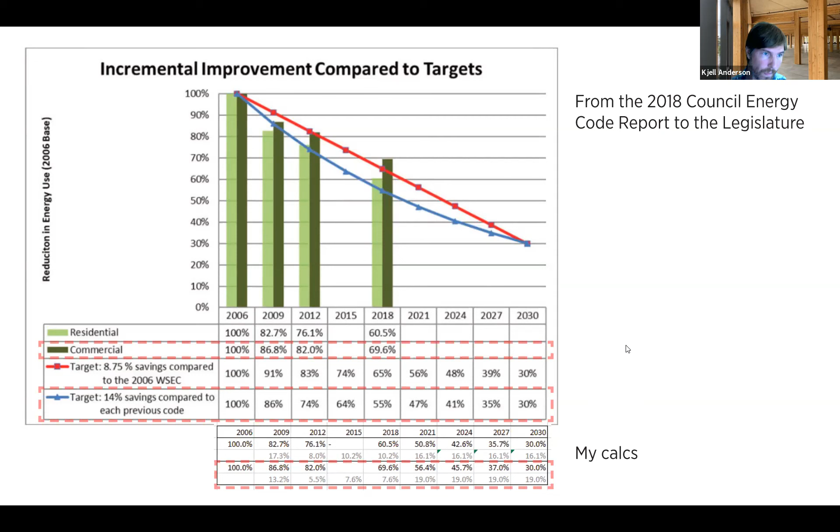We also considered that different building types, this is from the same report, have had different progress. For instance, retail has hit nearly a 50% energy reduction, so it's on track actually to meet the 70% energy use reduction. Whereas multifamily mid-rise was only 22%. That needs to get a bit more efficient.

There's lots of nuance that we could talk about in why these numbers are the way they are, but certainly multifamily mid-rise is a bit behind. Office is kind of right about where maybe it needs to be. Hotels and a few others are behind as well. This is all in the tag report, so we could put that in the chat if anybody wants to dig into that. It's a great deal of data, and the only touch point that the Building Code Council has with our progress on the energy code each cycle.

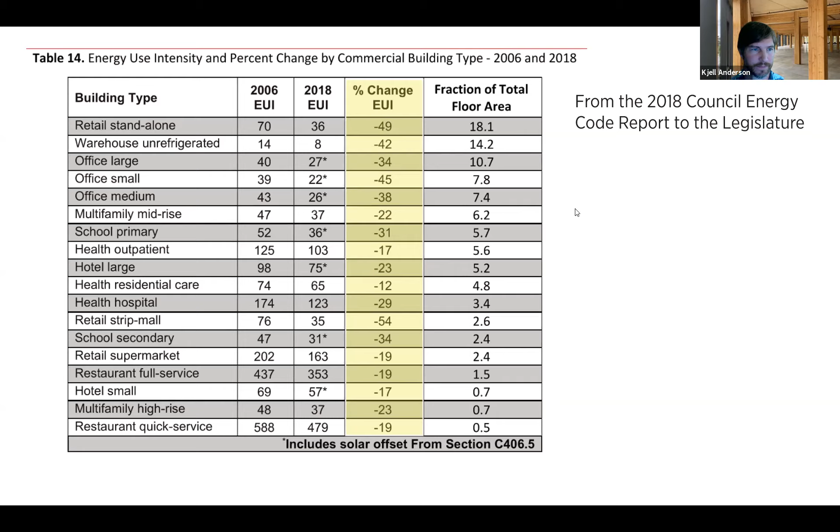So there's a couple other considerations we had this tag cycle. One was Clean Buildings Law, which will require all buildings over 50,000 square feet to do audits and potential retrofits if they do not meet certain energy use targets. That is being run by Commerce and is outside of the energy code. Yet, if buildings have to do the retrofits, they will have to comply with the energy code.

And it would be a dereliction of duty, in my opinion, if the Building Code Council wrote a code where buildings would be built and need to be retrofitted within the first 10 years or 5 years. That seems like we'd have a lot of irate building owners who would be justifiably irate if we did that. So that's another consideration.

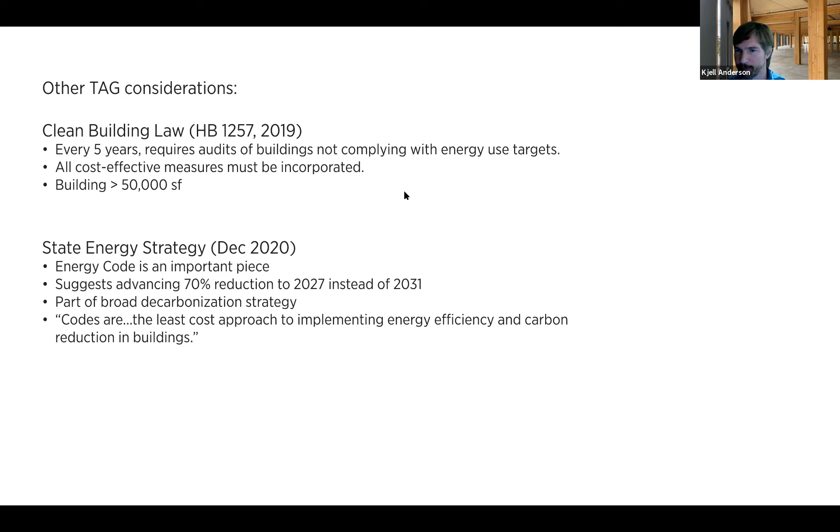And then the state energy strategy that was published in December 2020 is another consideration, and that relies heavily on the energy code for a lot of efficiency in new construction. So I'm just bringing it up so we have the lay of the land. We can discuss in more detail later.

And then this is on the agenda and the tag report, and this is basically a summary of all the proposals. Almost all the proposals were unanimous or maybe had a few abstentions. There were only a few. The green ones all passed, and you can see what the vote was for each of these here. So 14-1 this one, 11-1 this one, but we spent a lot of time on it. This one was 11-5. This one was 7-5-3, and then 12-1-2 on the other piece of the metric.

So the votes are all shown in here. The green ones were adopted by the tag and suggested that we move them forward. The red ones were minority reports that were voted down, and there's actually multiple pieces of these minority reports if you want to discuss them.

But these were each voted down by the tag, and you can see the votes down here as well. So these are the ones with probably the most substantive energy performance advancements, shown in green here, and also the most contentious issues, as probably they should be. Then there were a few others that didn't have unanimous votes - you can see there's usually one in opposition, sometimes two. So these are also ones that were not unanimous.

Everything else out of the 146 or so proposals was unanimously approved, denied, or withdrawn. So the tag did a great deal of work to get that forward. And I also want to point out that the first one here, the tag tabled it and didn't actually vote up or down on this one.

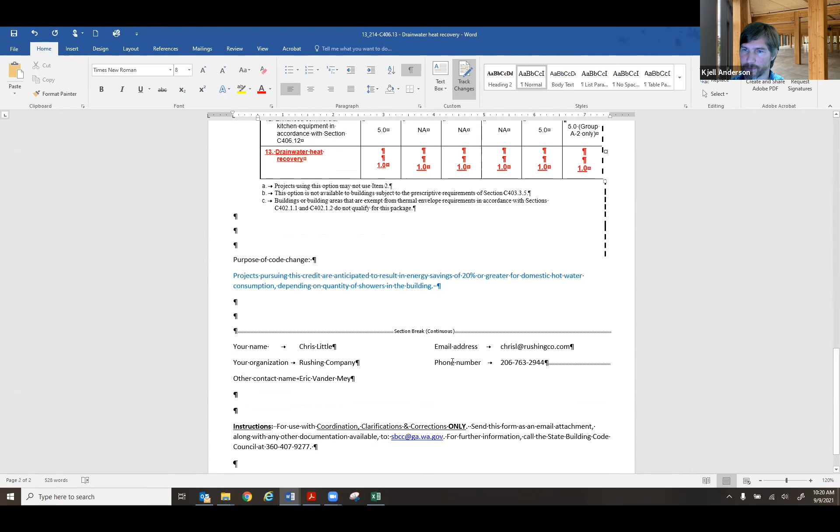Yeah, I guess, Chal, my thought on this one from the tag discussion was there was already a related measure in the approved C406, number 206 proposal, right? That is the shower drain water heat recovery. And I think there was some thought that this one could potentially also allow credit for commercial kitchen or laundry heat recovery. But the one already in 206 is already kind of approved, more enforceable and thought out, and I think this one had a few issues. So unless more work has been done on it between the tag and now.

Yeah, this is Chris Little. Sorry, I just joined. No, we haven't modified the language from the previous discussions. So I guess you said you did or did not change the language? I have not had a chance to. Okay, and there was a suggestion that the language should be changed slightly, right? There is, yeah. I apologize, I didn't know this meeting was happening. They had it on my list for this week - I thought it was a Friday deal.

So is this a missed opportunity for getting this one in the mix? Go ahead, Caroline. Oh, yeah, I mean, potentially the approved measure, maybe during the public comment period, could be modified to allow for other sorts of drain water heat recovery - that might be a good path at this point.

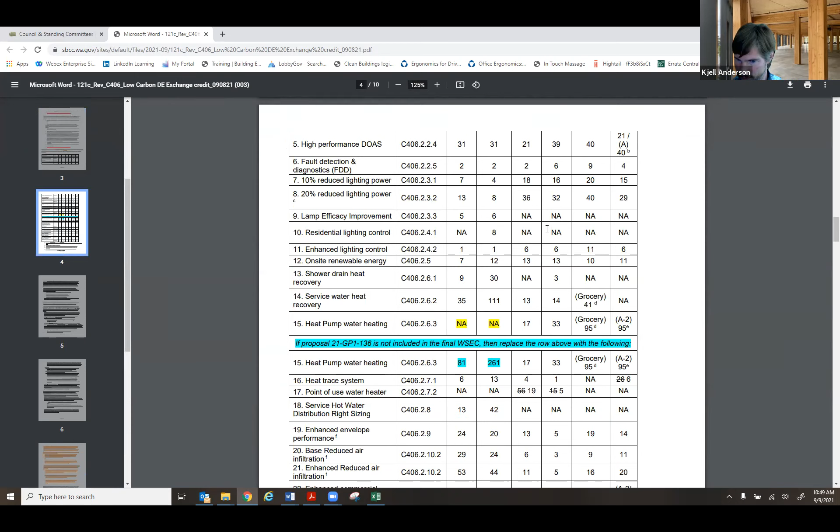Yeah, and that's got a big caveat on it, which is 136 has passed thus far, so you would not get credit in some categories for item 15 if the current code moves all the way forward.

So, I don't know, I guess I'm undecided if that's too many credits for a district system.

Is there an example of a district system that would meet that criteria in operation today? In an ideal case, I believe there is one. We can try and bring it up.

From a carbon perspective, I believe the Amazon campus—I don't know if you consider that district energy, the one where Amazon exchanges energy with a server, data center, across the street—so we're definitely open to the committee's recommendation on that. I'm not personally sure if Reed Hart's proposal addresses a cap on that at all.

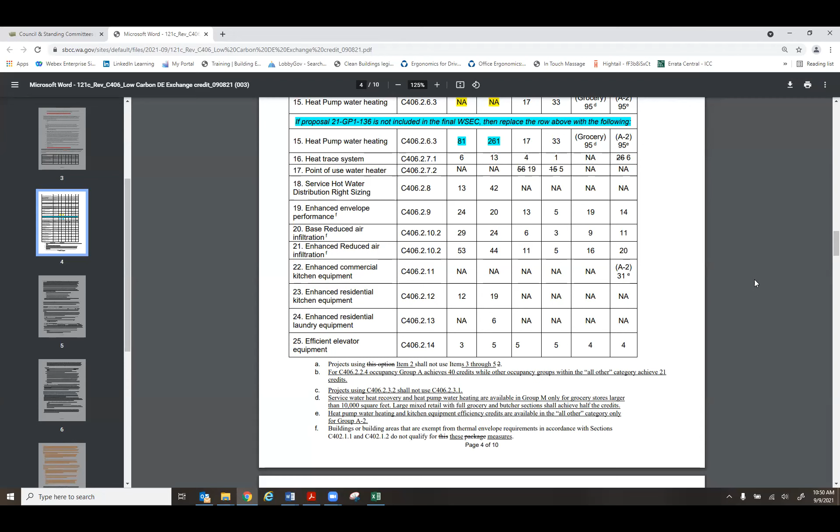I guess, Shel, one of the challenges is it sounds like the analysis and calculations are available for review with interested parties, and I know this particular version was just posted on the site this morning. So I'm wondering if a little bit more review of those thresholds and the credit allocations is needed, as you point out—we're not talking about 5 credits, we're potentially talking about a lot of credits being awarded to a project. Did I hear a motion to table?

Is that the only piece—the greater than 5% for the 5 to 20% efficiency increase realm? That's the part in contention right now?

I guess personally I'd also like to better understand the 45% threshold and the 25% from fossil fuel or electric resistance sources, and how that compares. I think the concept makes sense, the credits should be awarded. I just think, given how little review of those exact thresholds has been provided—and this particular version was not in front of the tag—that's my comment. I think that's reasonable.

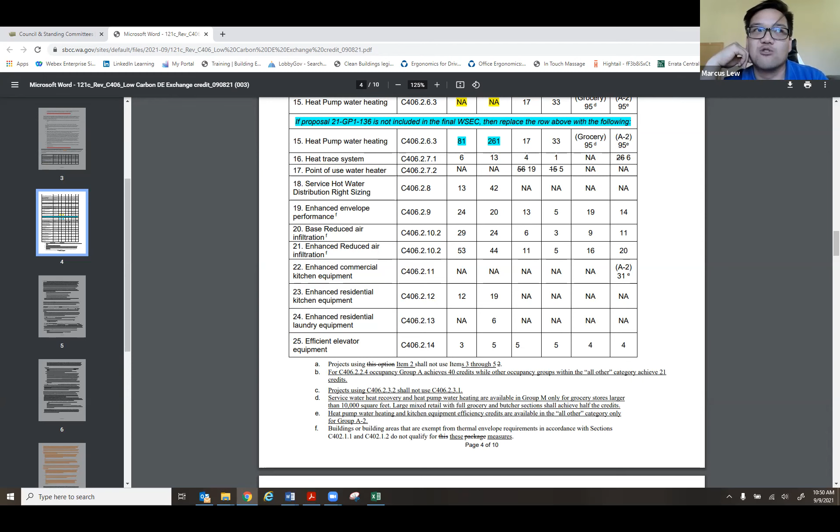Took a little bit to get everything set and an appropriate benchmark, but we think it's a good level, and any consideration for more credits of course has to be done on an individual applicant basis. So along with that value, we figured that the credits to be awarded would also be determined in that later analysis phase.

Okay, thanks. We can discuss. I'll set up a time. Thanks for working with everybody at the tag and continuing working with everybody. I think we generally have support, but we want to know more.

So thanks. Thank you. We will move on. Holly was the next person who had her hand up prior to this proposal being considered. So Holly. Yeah, hi, I'm reading from one screen, so if my head goes out, I don't realize it.

Hello, my name is Holly Towns. I'm a mechanical engineer who has specialized in energy efficiency in buildings my whole career. I'm also a longtime Washington resident and involved in a lot of citizens groups working to get buildings to net zero to fight climate change. I'm here to support the efforts of this committee to meet their obligation to reduce the emissions of greenhouse gases.

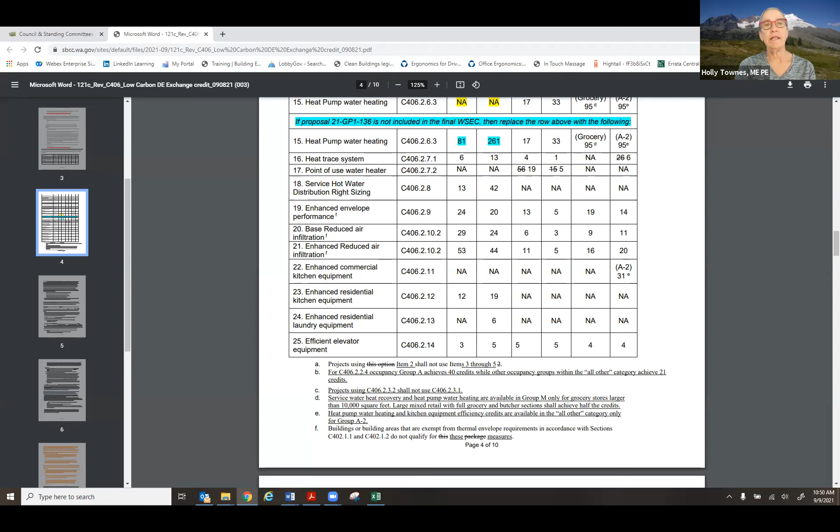The Energy Code has gone far in improving efficiency. Now the next most cost-effective step is reducing substantially the use of fossil fuel and electric resistance for space and water heating. I support and ask you to support the space and water heating efficient electric equipment proposals of RMI. When I worked at PSE in the commercial energy efficiency program, we incentivized new buildings to convert from electric heating to gas heat.

It made sense at the time, since the use of efficient on-site gas equipment emitted less greenhouse gases than producing electricity from coal and gas at a power plant to power heating. That said, this has never been true in many parts of the state where electricity was produced by water. But now fossil fuel on site does not make sense for any part of our state, since all electricity will soon be from clean sources. Now is the time to move away from fossil fuel heating to efficient electric heating to meet the state mandates to combat further climate change.

Buildings are the second largest contributor, as you know, to greenhouse gases, with new buildings being very efficient and only a small part of the problem. Making this change will not, therefore, tax our electric grid at this point. Existing buildings are the biggest contributors, and all buildings will need to be addressed in the coming years. It will be far cheaper to make these changes at the time of construction than having to retrofit more buildings.

In truth, I don't think the proposed code changes go far enough to reduce fossil fuels. There's a lot of exceptions. But despite the many compromises, this proposal is a concrete step forward to fight climate change. So please support the reduction in fossil fuel or resistance heating in the proposed energy code and move these proposals forward to the next step.

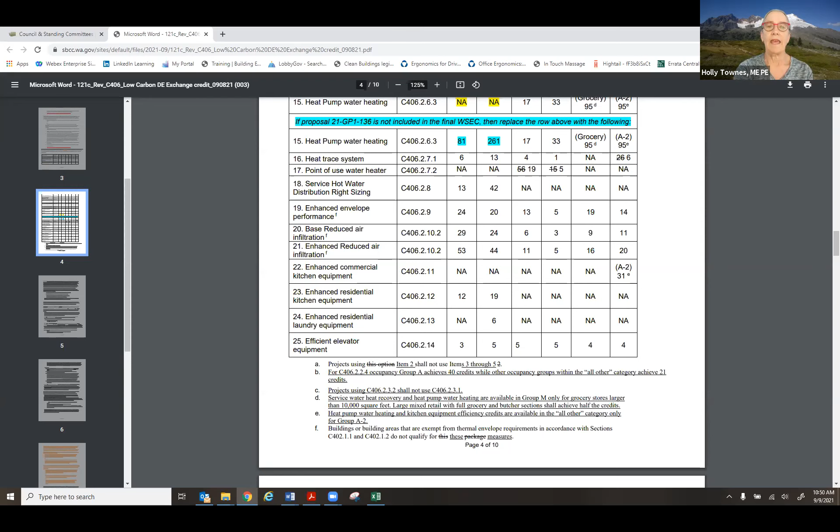Climate change is upon us, so I ask you to support this change for the economic and physical health of our citizens and our planet, for our children and our grandchildren. I want to thank you very much for your time and your many hours of effort to make this next crucial step work. Thank you. Thanks, Holly. The next on my list was Tom Young.

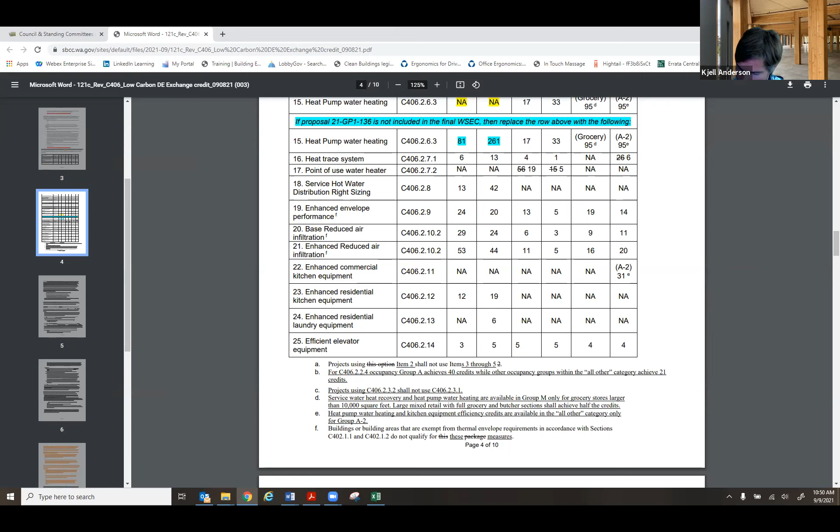I had some comments on two proposals that pertain to the same subject, 207 and 208. I don't know if we want to bring those up first, Mr. Chairman, or I can just comment. Why don't you just make your general comments, unless you're advocating for a few word changes, or something else? Something else, especially on 208, but 207 I can talk to without. Okay, why don't we bring those up, it's fodder for discussion. Great, that might make it easier to follow my comments. So 207 first? Yes, please.

As you're doing that, I'll comment. Both of these pertain to a mass wall provision in the code for certain specific building types. Both come from the Department of Enterprise Services, as you can see. The first proposal has to do with a modification of the provision that exists, and the second one actually removes the provision. So we have more heartburn with 208, but let's start with 207.

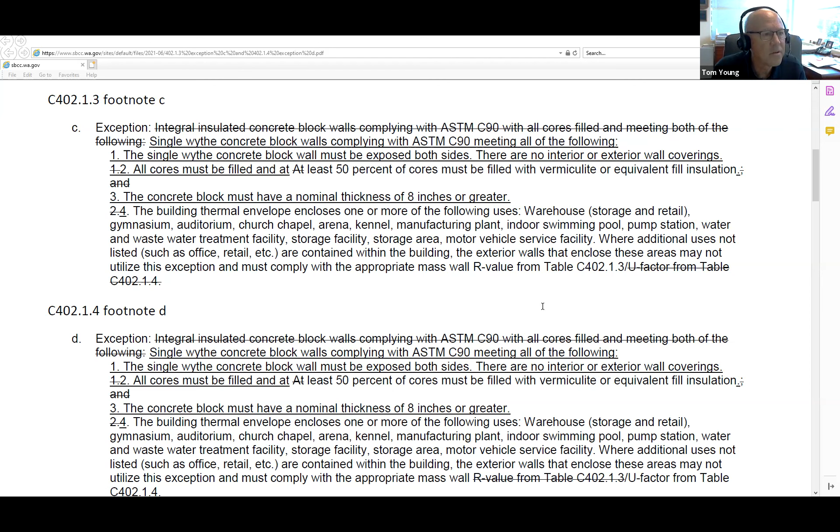Thanks, Tom, that was 207. Yes. Okay, so I guess does anybody else have comments on this particular proposal? This is Tonia Sorrell-Neal, I'm trying to raise my hand but I don't seem to know how to do that right now. Oh, if you click on reactions at the very bottom it says raise hand. Aha, thank you. Go ahead, Tonia.

I am Tonia Sorrell-Neal with the Masonry Institute of Washington, and I'm going to be a little bit more specific than Tom was on 208. This committee, well the entire Building Code Council, has taken up this discussion a number of times. One thing I would really like is some opportunity to talk with the Department of Enterprise Services about why they're bringing this proposal forward, and we haven't had the chance to do that, including some of the information they're basing their amendment on. So I'd like to ask this committee to table this and direct the industry to have additional communication with DES about the thought process through this.

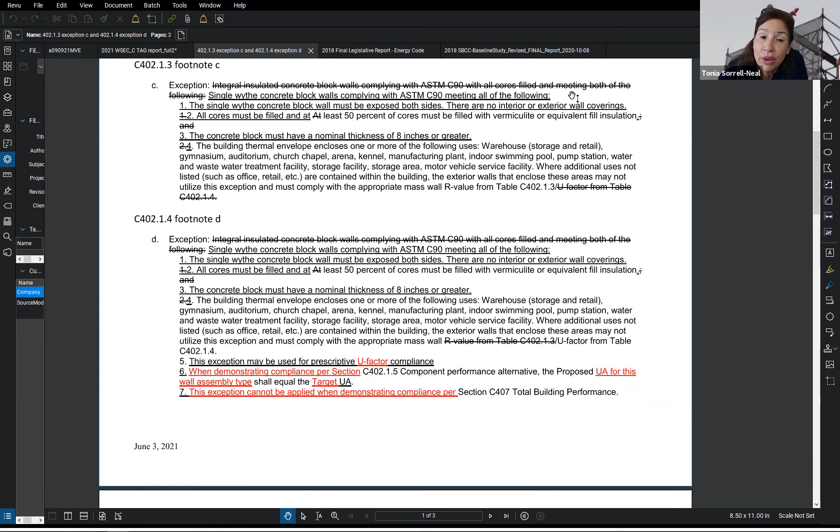To say that the only impact is to take away the prescriptive and there are still other pathways is perhaps a true statement. Unfortunately, what's not true is the economic impact to whether or not these buildings can continue to be built in those other pathways. I don't think it's fair to lead this committee to believe that there's other options and those are completely viable. I will tell you that financially, it is not viable to take some of these other pathways.

These buildings that are in this exception, I noted in the early part of the conversation today, these building types, most of them are on track to meet the requirements of energy efficiency based on other elements. The amount of energy savings that will impact that line you presented on the chart earlier is so minimal compared to the economic negative to these buildings and to this industry that I think there needs to be a little bit more conversation other than the fact that our thoughts are ridiculous.

I take exception with those comments and ask everyone to please include me and others in this conversation. I would like the opportunity to discuss with DES where they're coming from and why the economic impact is such a big deal to our industry.

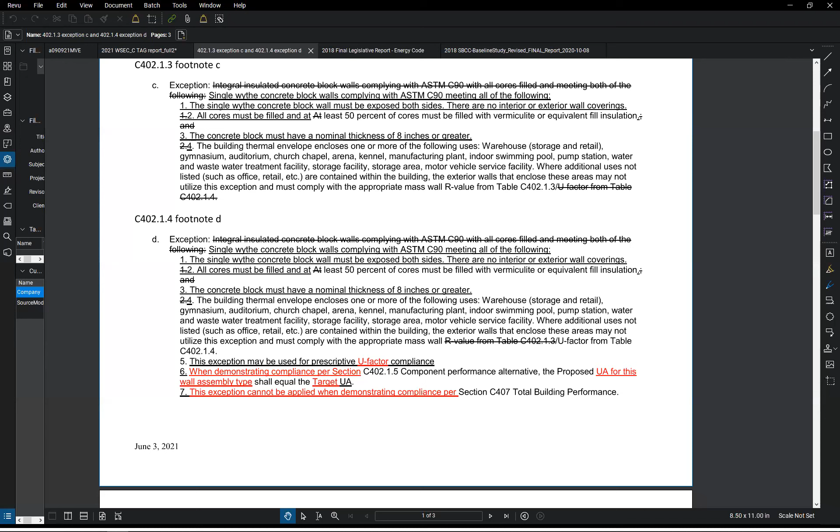I will state that the economics of it can vary depending on the construction type and materials used. But it is our estimate that this proposal, the economics of it, are low to no cost compared to when the proposed wall will be covered anyways.

Thanks Luke. Todd. Thanks, it was just a clarifying question. Thank you, Ms. Sorrell-Neal and Mr. Young. When you refer to cost, it seems you're referring to first cost, right? The economic impact of first cost is what I'm interpreting. Is that correct?

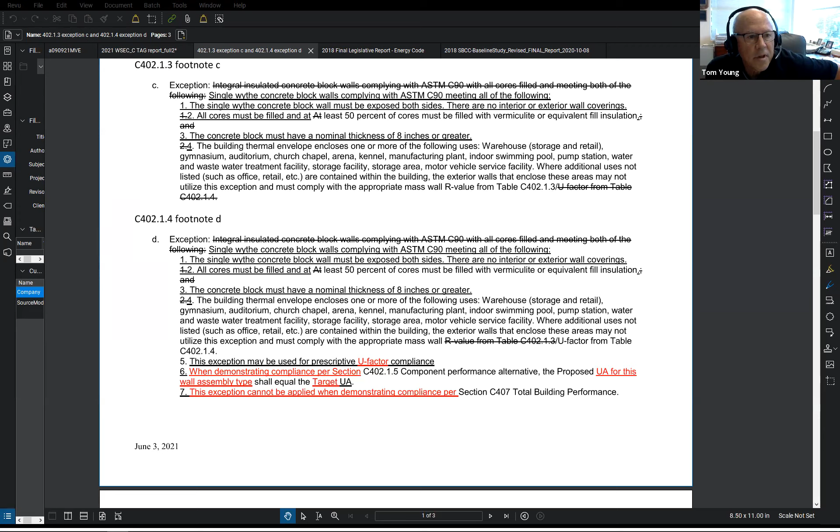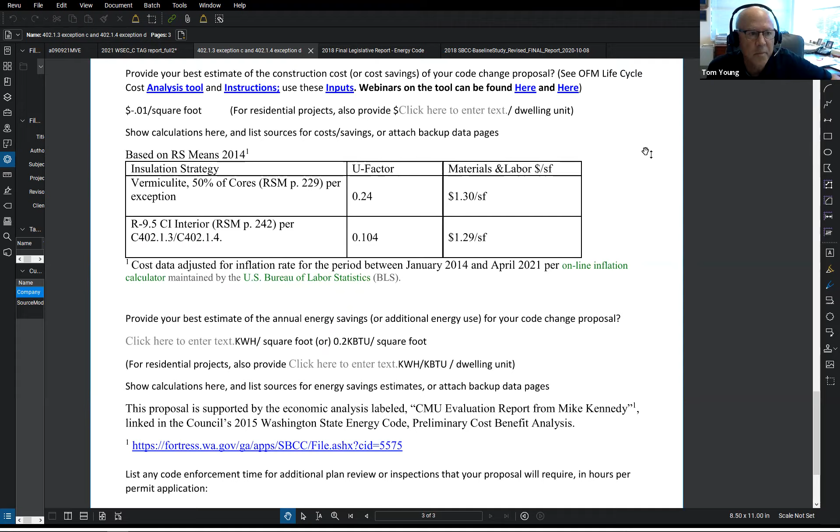I was referring to actually both. The first costs that are shown here in terms of the alternatives, but really more importantly, and one of our supporting arguments for the provision that is in the code today, is ultimate life cycle cost effectiveness. So that becomes even more important in terms of an analysis. But yes, the costs that are shown here are first costs.

Okay, I also just procedurally, we have 146 proposals in front of us that are on the agenda. The only thing we need to do today is, well, probably going to do today is move all of them forward to the Building Code Council. We could also do that next week. So we can discuss this issue and do nothing on it, or we could, as a committee, do something on it today. But if we don't do anything, that's also fine, because eventually we're going to move this whole package forward with whatever modifications we want to make to the Building Code Council.

So we can take up issues like this, and we don't need to have a motion to move them forward, or move individual proposals forward, or do anything else with individual proposals. So what I plan on doing is taking comments, and then if committee members want to make a motion on a specific proposal, they are welcome to. And once everybody's spoken twice and we have no more speakers on a subject, we'll move on to the next subject, and I'll ask if committee members want to make a motion on it, and if not, then we will move on to the next subject.

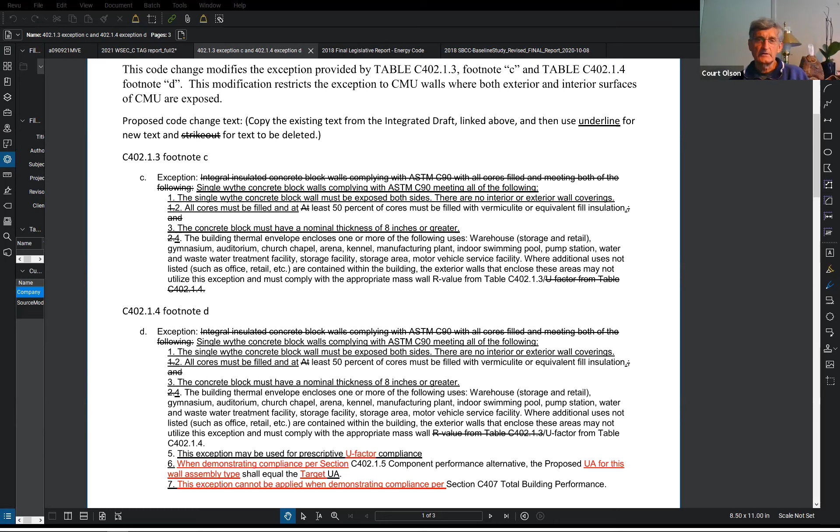I'd like to make a quick comment in support of what Holly Towns said earlier on space and water heating. We're not covering space and water heating right now, we're covering concrete masonry unit construction, mass walls. Yeah, I thought you just finished, so pardon me.

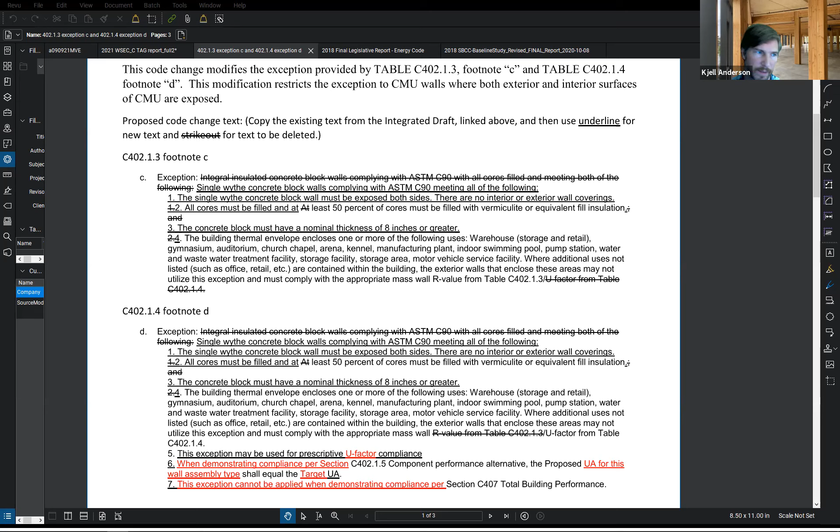We are very close to finishing this one. Are there further comments on the CMU proposal? Do any committee members want to make a motion on 207? Are there any committee members that want to make a motion on 207 at this point?

Tom, I know you wanted to talk about 208. Can you talk about it in a couple minutes? I will do my best. Some of the same comments actually apply there as well, Mr. Chairman, so I'll be quick.

208 - I have stringent opposition to it. It removes the provision completely. I term it more of a deemed-to-comply provision than an exception, if you will. It's a defined system that is deemed to comply. There are other parts of the code with very similar criteria, but on this one there's insufficient information and data provided to support complete removal of this provision from the code.

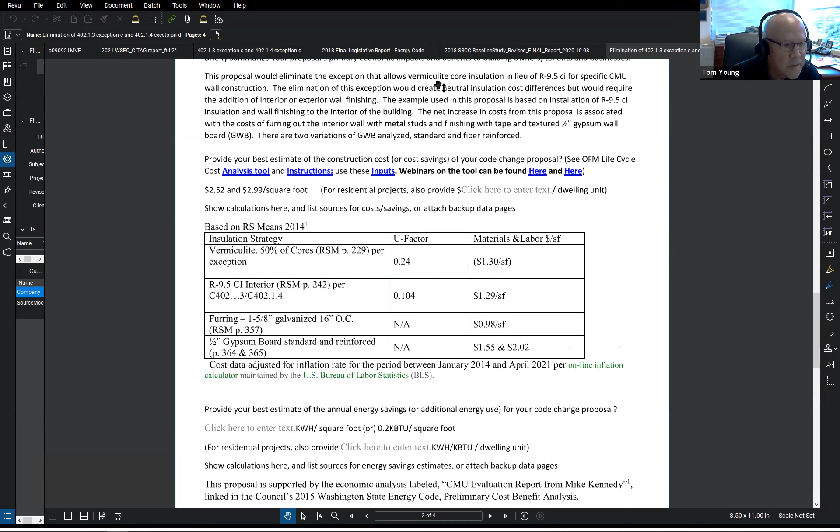Again, I think the cost data shown here, but also the life cycle costing, which is very important and required for these code changes, is not reflective of reality. These costs seem very low and essentially are not representative. I think another key point here is the wall construction typically seen in commercial buildings.

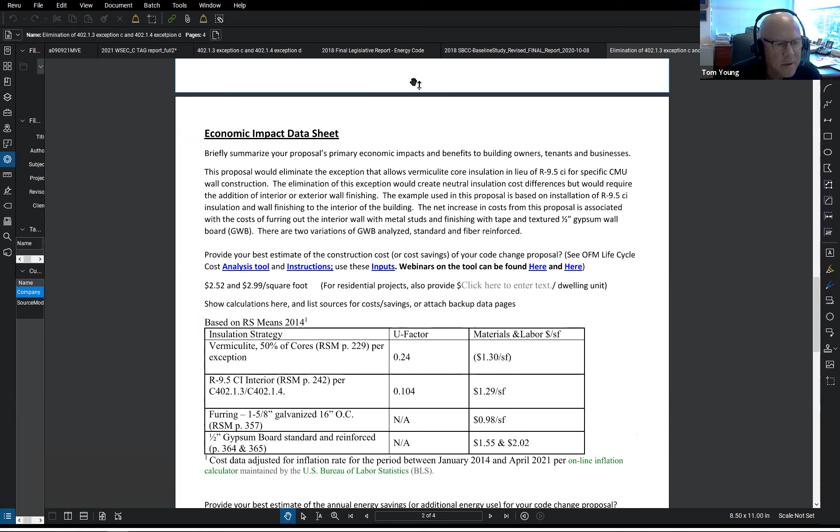We aren't just furring walls out. Lisa made the remark that you can still build CMU walls with these provisions. It does change the economics, as Tanya said, but you can still insulate these walls - this provision doesn't mandate that you can't insulate CMU walls. And when we see that done, it's not with a furring system at all in commercial construction. These are tall walls typically, and furring systems don't work well, so you're building metal stud walls typically behind these walls. The cost data here isn't reflective of reality and what types of buildings you would actually build.

We did raise these concerns at the tag level and raised questions about the supporting information provided, but didn't get much good in terms of answers as far as building type, building size, what was really analyzed here. So we don't feel it was thoroughly vetted at that level, and it wasn't a unanimous vote either to support. I'll close there.

If you require these walls to be insulated, you lose a lot of the durability and fire resistance benefits as well. This deemed-to-comply exception is for specific types of buildings where it makes good sense to allow CMU walls, integrally insulated, to be exposed, providing the durability and fire safety that building owners desire. I'll stop there.

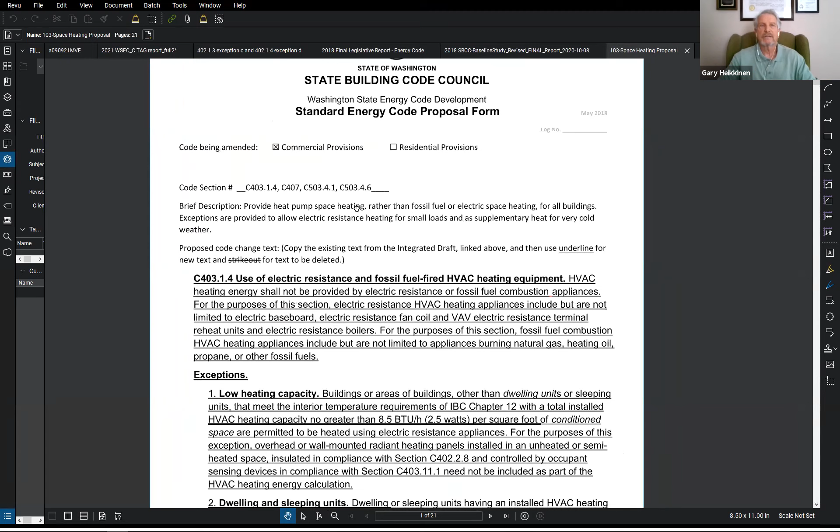To put things into perspective, the direct use of natural gas in commercial buildings in Washington state represents about 3.3% of total emissions. So this very consequential and disruptive proposal, basically to ban the use of natural gas, will only have a minimal effect, if any, to reduce emissions, and will sometimes result in increased emissions during certain peak heating times. It will continue to push peak electric loads up over time, requiring additional investments in electric generation, transmission and distribution capacity. This proposal basically bans the use of highly efficient and cost-effective gas options and prescriptively mandates only one energy choice, and has been stated to be one of the only ways to meet the 70% reduction in energy use.

A report by the Northwest Energy Efficiency Alliance determined otherwise, and shows that high efficiency natural gas space heating can still be used to meet the 70% energy reduction goals by 2031. This particular proposal allows

17 exceptions, 14 of which would allow the continued use of electric resistance heating, mostly for backup. But many of these are going to happen during cold weather, during peak electricity demand, when the marginal electric generation resources will certainly be utilizing fossil fuels, with the effect of increasing emissions rather than decreasing emissions during that point in time.

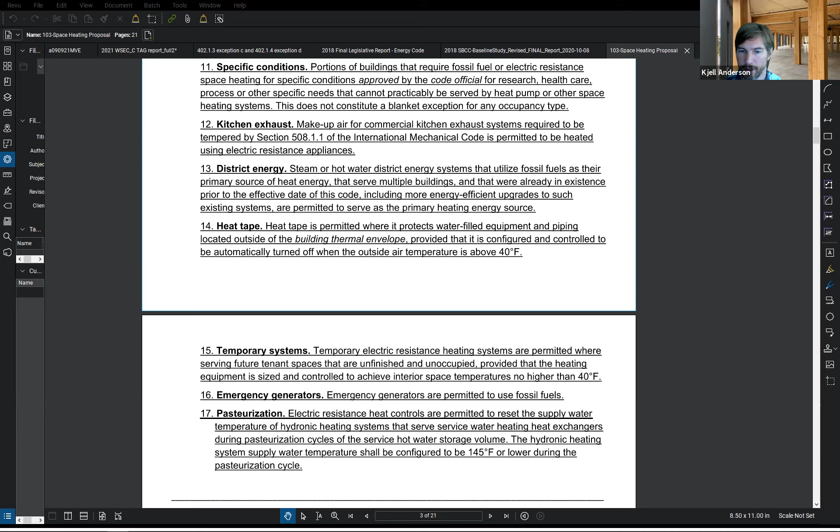Thanks, Kjell. I want to make a few comments based on Gary's comments about this. First of all, Gary characterizes gas as highly efficient, but actually the maximum efficiency of gas equipment being installed now is less than 100%. It's basically boilers or whatever in the 90s maybe, whereas heat pump technology has a COP of 3 or higher,

which is basically 3 times, or 300% efficient, or what have you. So the notion that gas is efficient is ridiculous in the context of the equipment that's available today as an alternative. The other thing that was mentioned is that we're going to have to increase our peak electricity.

That is absolutely right. If we move to electricity, we'll need more generating capacity, but the state has a mandate that generating capacity will be clean. So it's not that we're going to be adding coal plants and dirty electricity to meet the peak. We're going to be adding clean electricity to meet the peak, and storage and what have you, and other technologies moving forward. That's mandated in the state.

So the electricity system is getting cleaner. The gas system is not getting cleaner at anything like the same rate. And the notion of introducing 10% renewable gas is pretty far-fetched, really. There's not a good pathway to that, and that's kind of the theoretical limit anyway. So in the end, the electricity system is going to be much, much cleaner than the gas system.

Also, I would point out that in the development of this proposal, we actually proposed to include gas heat pump technology in the proposal in the first round before it came before the TAG, and the gas industry actually vetoed that. So even though they say they want to encourage gas heat pump technology, they took it out of the proposal so they could oppose it unilaterally.

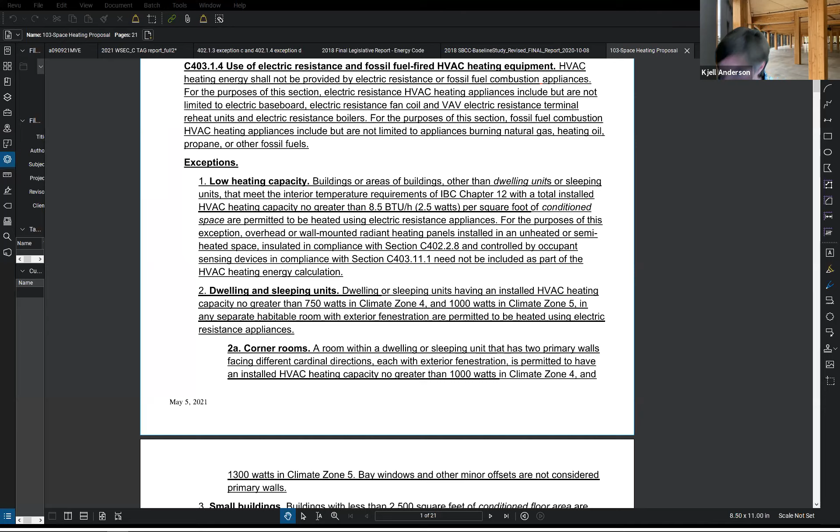Thank you. Great, thank you very much for the time. I'm also going to just speak shortly on heat pumps, both space heating and water heating. And to be efficient with my time, I'd like to echo the comments made by Holly and the proposals presented by RMI.

My name is Albert Rooks. I'm the current CEO of Small Planet Supply. I'm also the current president of Passive House Northwest. The Small Planet Supply role has me in an industry position, building capacity for heat pump water heating for single and multifamily buildings, as well as heat pump space heating and cooling for single family and multifamily buildings.

I think I'm just going to speak very quickly about capacity building. And currently, over the last 12 months, I'd say the capacity focus on being able to accomplish serving loads through heat pumps has increased greatly. It's on a great track.

I've been a little distracted this morning because my team just presented me with a rather large heat pump product that we'll be assembling and manufacturing here in Washington State using CO2 as a refrigerant, with a capacity of 54 kilowatts, which is huge. Currently that would be appropriate to serve roughly 150 occupants in a multifamily building just in water heating alone. So on the capacity building side, things are really going quite well, and we're all working really hard. So should the codes encourage this direction, I think industry is really ready to step in and serve the demand.

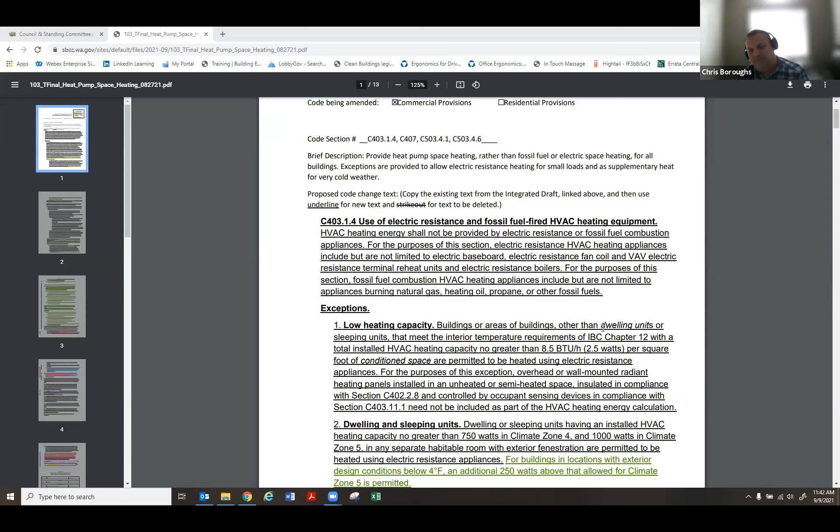Hey Chell, thank you so much. And I apologize for before, it just gets a little frustrating since I spent all summer working with the proponent of this, trying to come up with a compromise proposal, only to be told that we didn't want to work with people. I just want everyone informed that we did. The gas industry spent multiple hours all summer trying to come up with a compromise proposal, and I'll echo that, this and the other heat pump proposal. Yeah, there were so many. A lot of good work outside the TAG to try to make it the best path forward for Washington, and it was voted for and against by people as well. Yeah, so Chris, thank you for working.

Exactly, yeah of course. And basically what I just want to let the committee know at this point is that at PSE, we understand the future is to decarbonize our energy sources, and we're coming up with a plan. It was mentioned, I forget by who, that there are legislative directives to come up with those plans, and we are coming up with those plans. We're doing studies, figuring out what the cost is for the various ways of getting to our shared goal of decarbonizing our energy supply.

I had the opportunity last night to meet with some of our transmission engineers, and I just wanted to share a couple highlights of what he told me about the different costs. So basically the analysis we ran at PSE was, by 2040, what would the cost be to our electric system. This does not have to do with getting the supply of green power, that's a whole different subject. This is the cost just of the distribution system to replace the BTUs that were taken up by natural gas and natural gas heating sources.

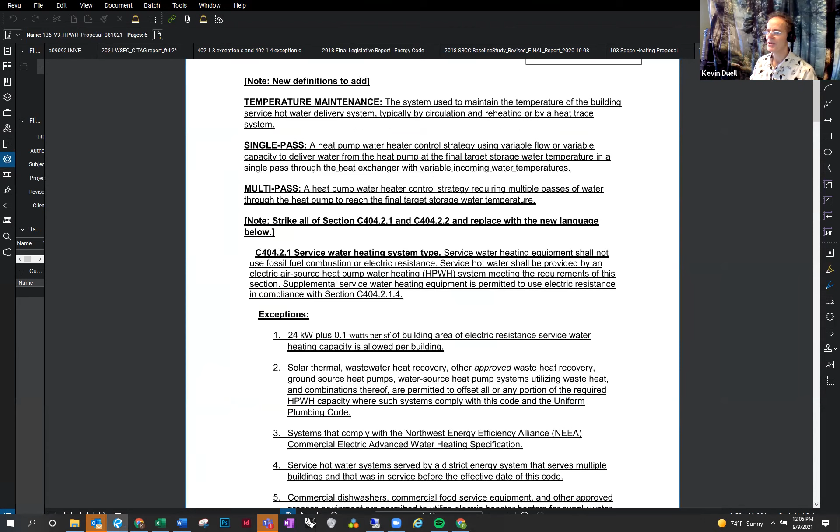I just, speaking in general, I do appreciate the work that TAG has put into this. Just for the record, this is Kevin Duell with Northwest Natural. A couple concerns with the water heater proposal. One, I'll echo what Chris said, but there are certainly manufacturers of the equipment.

We've heard of many projects being done in California in particular, and Washington as well. But it appears there's only a couple manufacturers, what I would consider top-grade manufacturers for the equipment. Mitsubishi for one, for the larger-scale commercial-grade equipment, but also A.O. Smith for like a smaller tank-type commercial unit, reminiscent of a residential-style unit.

And as you may have noticed in the voting on this measure, that was an 11-5 approval. Part of the reason for that 5 vote was concern from industry about specifications for projects. There are projects being designed right now that will be hitting the permitting process when this code comes into effect. And as a design engineer, that's been the majority of my career, I needed to have multiple manufacturers to specify, particularly for a public bid project.

I think the law requires 3 manufacturers. A lot of private bid projects require the same, just for economic competition. And I'm not seeing that many manufacturers. The technology I think that Mitsubishi makes is solid. It's just, I don't think the market is fully fledged out.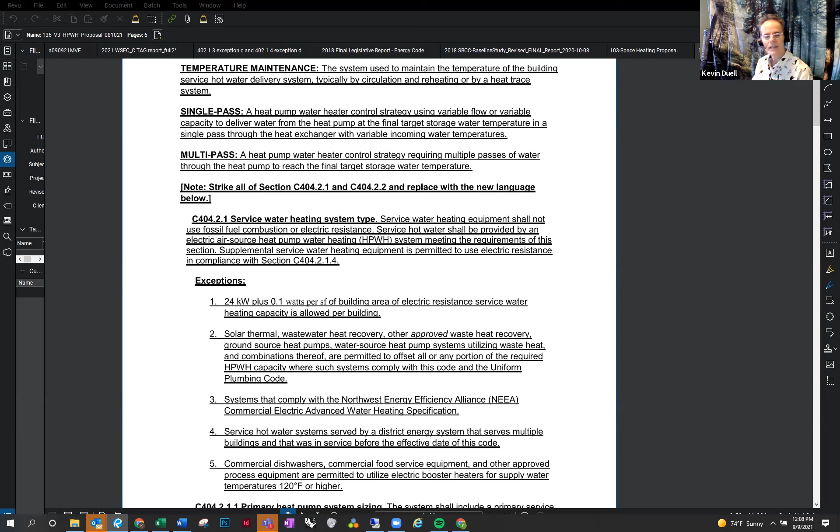But there are other ways to go here, and one that is the minority report is a gas-fired heat pump water heater that advances the efficiency from the federal minimum of, I believe, 82% to 124%, which would be in line with that 19% per code cycle improvement in efficiency. The advantage of that technology is flexibility—the ability to upgrade an existing system that is gas-fired without requiring more area for tanks and other equipment, or a larger service perhaps. I know this proposal does allow many exceptions for complications, but a direct change out is always easier than a retrofit of a new technology or fuel system.

It's also a concern that, in the proposal, it's stated this will have a life cycle cost increase to a project. There's concern how that might affect a small business, particularly a minority-owned business. There was a proposal presented to the TAG to have an economic analysis through the Washington Economic Impact Bureau—I forget the proper title of the group, I apologize—and also an equity impact analysis. I would suggest those are still in order. This is a major change to the code, with impacts that are, I would suggest, not foreseeable without more analysis. So thank you, appreciate the time to make the comments.

Thanks, Kevin. Albert, you're next. Hey, thanks. I want to kind of reach back to the prior comment and the one made by Chris.

Implementing heat pump water heating in the Pacific Northwest does bring up some questions, but I think the last 6 to 7 years of research by Ecotope and others have answered a lot of those questions, and the capacity and serviceability has been confirmed. As a company, we're providing large building heat pump water heating projects using CO2 refrigerants in Vancouver BC, California, Washington, and Oregon. Global logistics have provided some challenges in production and delivery of units, but that seems to be waning and things seem to be catching up. The Advanced Water Heating Initiative by Bonneville Power Administration and other stakeholders have really coalesced a lot of solutions and manufacturers, including Mitsubishi, who's bringing a 40 kilowatt unit to market. There are no less than 3, I think 4, CO2 large building water heating solutions coming to market. So I think we're going to see plenty of choices, and we've already confirmed reliability in cold temperatures as cold as we can find them in the state.

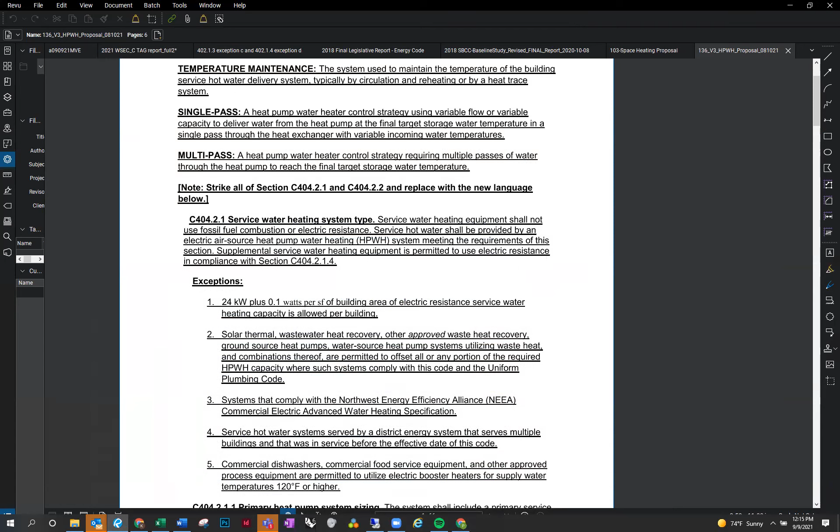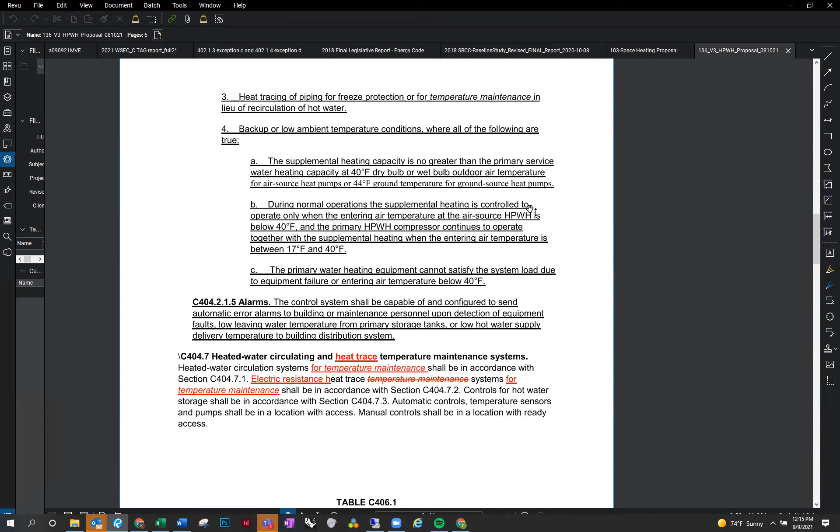Hi, thank you. I just wanted to make a brief comment with regards to how this proposed provision applies to existing buildings. I participated in the working group for that, and in our opinion the language in there is very reasonable. There's a lot of flexibility with regards to when this would be required in an existing building, so I just wanted to comment on that specific detail in the proposal. We feel that it was well developed, and I think it gives the jurisdictions the flexibility they will need when addressing buildings that are upgrading their service water heating systems. Thank you.

Thanks, Lisa. Okay, I'm not seeing other hands up. Brian Ahey.

Hey, good afternoon. Brian Ahey with Bradford White Corporation, which is an American-owned full-line manufacturer of residential, commercial, and industrial products for water heating, space heating, combination heating, and water storage. Our company has been recognized as an Energy Star Partner of the Year in both 2020 and 2021. We appreciate the opportunity to participate in the process, and as a manufacturer, we support Chris and Kevin's comments and share their concerns as well.

Part of what needs to be considered, as a manufacturer, is the availability and number of manufacturers that are out there, and the training of installers, plumbers, architects, engineers, and builders. This does need to be considered for this proposal.

We would also ask what other exceptions have been considered in this proposal. The proponent points to California REACH codes and the 50 cities that have adopted all-electric. We would like to note that those same 50 cities have included exemptions, which include healthcare facilities, essential facilities, industrial facilities, and scientific laboratories, if the applicant establishes that there is not an all-electric prescriptive compliance pathway for the building under the energy code, or that the building is not able to achieve the performance compliance standard applicable under the energy code. So we'd like to make sure that those are addressed with this proposal.

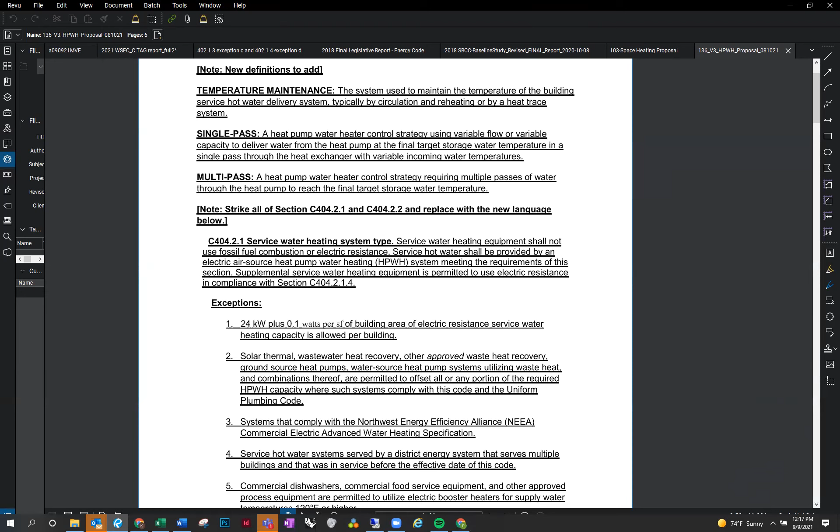The proposal also has a GWP requirement which doesn't parallel what's currently out there for CARB or AIM. We'd like to see that be in tandem or match what is currently out there. And we'd just like to say that as Washington State approaches the 2031 State Energy Code reduction to achieve a 70% reduction in annual net energy consumption, this can be done in incremental steps, and we should not apply a one-size-fits-all electrification approach to commercial buildings for the entire state of Washington.

Thanks, Brian. And if the committee today doesn't act on your recommendations, you are welcome and encouraged to submit any of those as public comments when this goes to the CR 102 process.

Johnny. Yeah, just wanted to say, I can show if it's useful, every single ordinance in California - it's a hodgepodge on which facilities are required, but I'm counting at least 15 cities that have gone for every single occupancy type requiring all electric. Some give exemptions for restaurants and some give exemptions for laboratories. I don't see hospitals here, but I do have the information, and I'm more than welcome to share it with anybody that's interested.